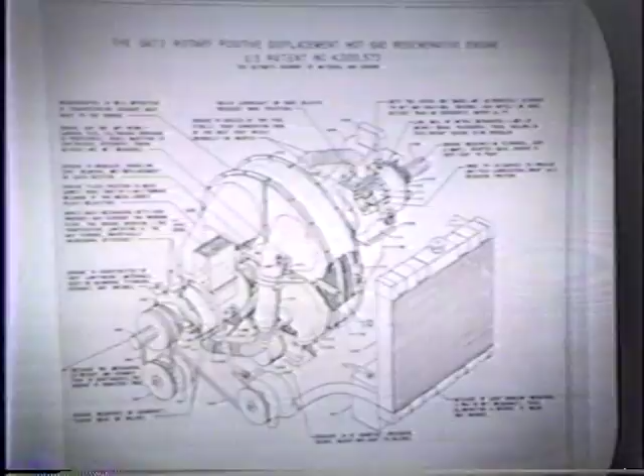Hello, my name is Ron Satz. I'm president of Transpower Corporation, a systems engineering and consulting company founded in 1976. I hold a Bachelor of Science degree in Engineering Science and a Master of Engineering degree in Transportation Engineering from the Rensselaer Polytechnic Institute, and I completed the coursework for my PhD in Mechanical Engineering from the Massachusetts Institute of Technology. I am a member of the American Society of Mechanical Engineers, the Society of Automotive Engineers, and the Operations Research Society of America.

Today's presentation will describe a revolutionary new concept in engine design: the Satz Rotary Positive Displacement Hot Gas Regenerative Engine, U.S. patent number 4,009,573. This presentation is based on my copyrighted book, Theory and Design of the New Rational Combustion Engine, and my paper, The Solution to the Gas Turbine Temperature Problem, published in Volume 20 of the International Journal of Energy Conversion and Management.

The book, which was originally intended to be my doctoral thesis and is now available from Transpower Corporation, contains 28 engineering drawings, 30 tables, 800 equations, 17 figures, and excerpts from the 10 computer programs which went into designing this engine. Nearly 500 pages long, it is one of the most extensive studies of an engine ever written. I left MIT in order to secure patent rights on the new engine.

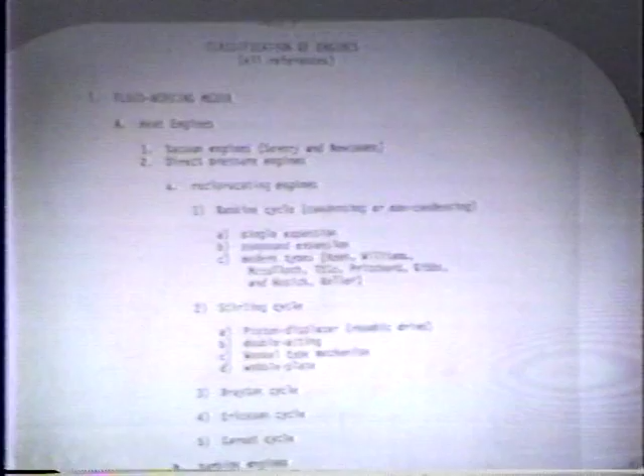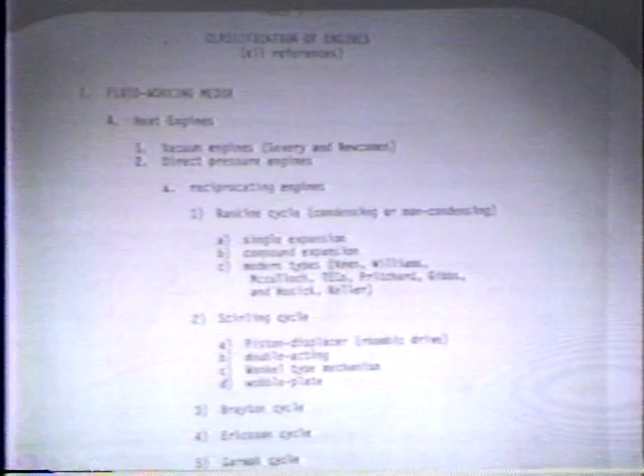Right now, I'll show you a transparency of a classification of all existing engines. There are two main types of engines, those which have fluid working media and those which have electron working media. I'm not going to go in great detail of these different types, but I'll just point out that fluid working media type engines are divided into heat engines and combustion engines. And the heat engines are divided into vacuum type engines and direct pressure engines. And direct pressure engines are divided into reciprocating type engines and turbine engines.

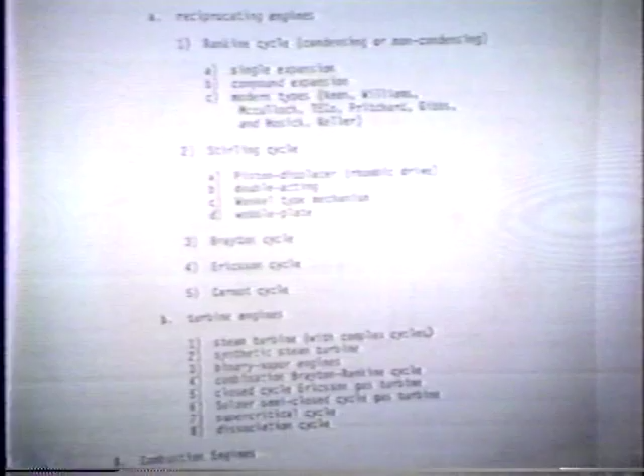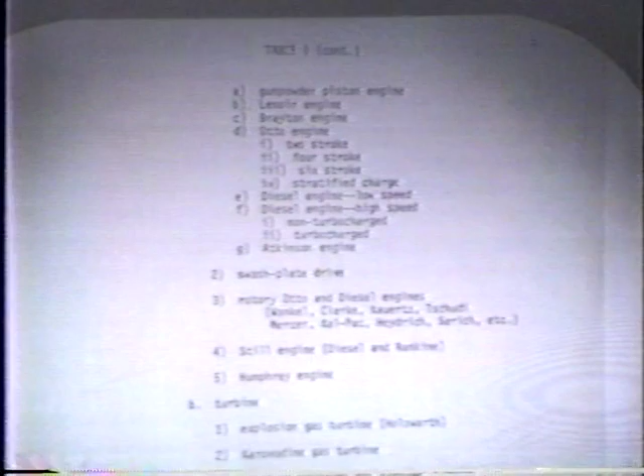The first working gas turbine was built in Paris in 1903 and showed an efficiency of 3%. Like the Brayton piston engine, there were a compressor and an expander, but these components were dynamic rather than positive displacement. It was not until the decade of 1950 to 1960 that the gas turbine was sufficiently developed to replace the reciprocating piston engine in aircraft. The main reason for this success of the gas turbine is its very high specific power density, the ratio of power output to weight.

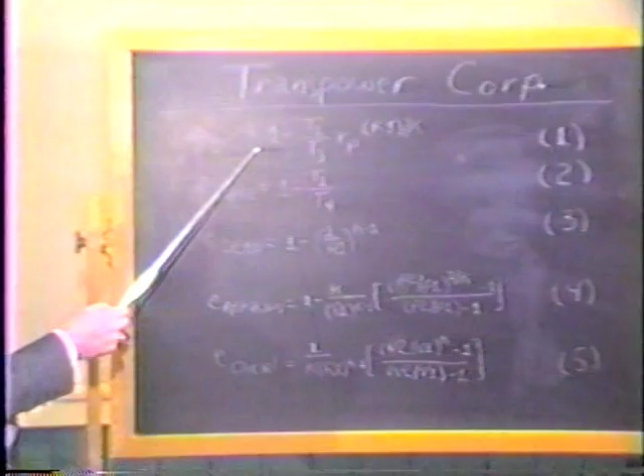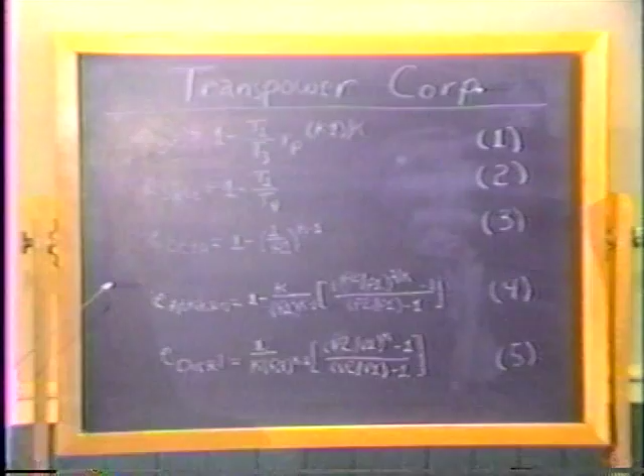The equation for the ideal thermal efficiency of the regenerative gas turbine is given in Faires' thermodynamics as efficiency equals 1 minus T1 divided by T3 times the pressure ratio, that's expander pressure ratio, raised to the power (K minus 1) divided by K, where K is the ratio of specific heats. T1 is the engine inlet temperature, T3 is the inlet products temperature to the turbine expander, R_P, as I said, is the expander pressure ratio, and again, K is the ratio of specific heats of the working fluid.

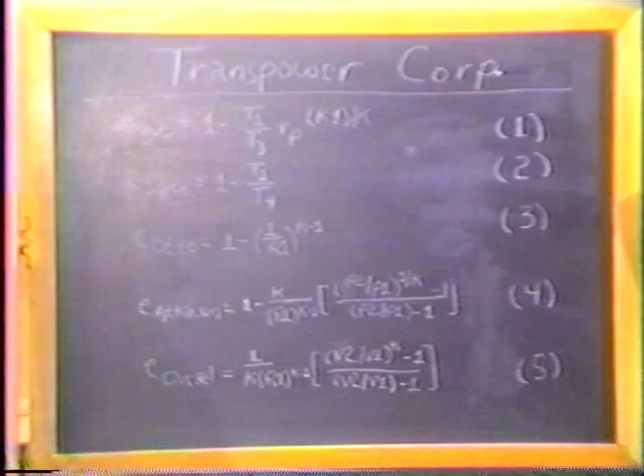Note that as R_P decreases to 1, the efficiency approaches that of the Carnot, Ericsson, or Stirling engines, but with no work done. With ambient air, there is not much that can be done with T1 or K. The only parameter left is T3, which is, again, the inlet products temperature to the turbine expander. So, with each increment of T3, there is a corresponding increment in the efficiency of a gas turbine.

Thus, the focus of gas turbine research over the past several decades has been to find turbine expander materials to withstand ever-increasing temperatures, the current limit being approximately 1311 K. One other method of increasing temperature has been to use transpiration cooling, in which water or air are circulated within the blading. If water is used, the heat absorbed would ordinarily be lost from the engine. If compressed air from the compressor is used, the heat could be recovered, that is, after cooling the blading, the air could be expanded in the expander.

However, if the air does pass through the regenerator first, then not too great a reduction in blading temperature would be possible, for the blading would then be at some temperature between that of the combustion air and that of the cooling air. If the air does not pass through the regenerator before cooling the blading, then of course energy is not recovered. In addition to these heat transfer problems, there are practical ones. How can transpiration cooling be accomplished without drastically increasing the cost of the already expensive blading?

Here then is the gas turbine temperature problem. There are no materials and presently no transpiration cooling methods that can be used to enable the gas turbine to run at such a temperature so as to be able to compete successfully against the Otto and diesel engines below 5,000 brake horsepower.

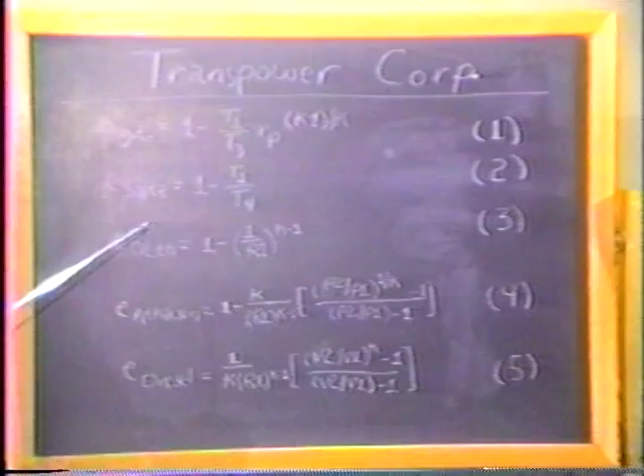Now that equation can be substituted into equation 1 on the blackboard, and we then obtain the equation for the ideal efficiency of the SATS engine, 1 − T1/T4, where again T1 is the ambient air temperature and T4 is the temperature of the fully expanded gas before regeneration. Thus, the higher the temperature that the regenerator material can withstand, the greater the efficiency.

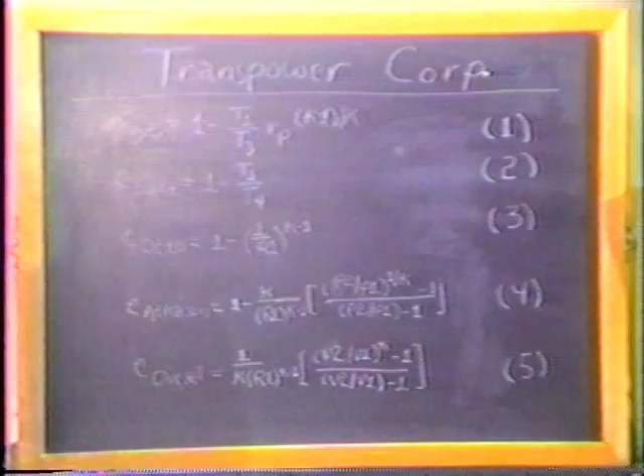For concreteness, let's compare the ideal efficiencies of the gas turbine and the SATS engine. Suppose that T1 equals 302.6 K, which is, by the way, the SAE standard ambient temperature, and that T3 for the gas turbine, that is the temperature of the inlet products to the turbine wheel, is 1311 K. Then by equation 1, we get that the efficiency of the gas turbine is 61.5%. That, of course, is the ideal efficiency, 61.5%.

For the SATS engine, assume that the present maximum temperature that the regenerator can withstand is 1367 K. Thus, in equation 2, T4 equals 1367 K. And therefore, the ideal efficiency of the SATS engine is 77.9%. This is an improvement of 16.4 points over that of the gas turbine. It should by now be clear to the listener that the SATS engine should always be more efficient than the gas turbine. Any exotic new material allowing extra high turbine wheel inlet temperatures could, presumably, be used for the regenerator of the SATS engine, so the advantage should remain.

Okay, now we'll go through a logical derivation of the new engine. The first step is to decide whether the cycle should be open or closed. Closed cycle engines using high-pressure steam, helium, or hydrogen are common in large power plants. However, the open cycle using air is more rational for the following reasons. A, air is free, whereas hydrogen, helium, or water is not. B, no storage of the working fluid is required. C, less complicated control systems may be utilized. And D, high-pressure hydrogen, helium, or water has the potential for leakage and explosions. So the new rational engine will utilize the open cycle.

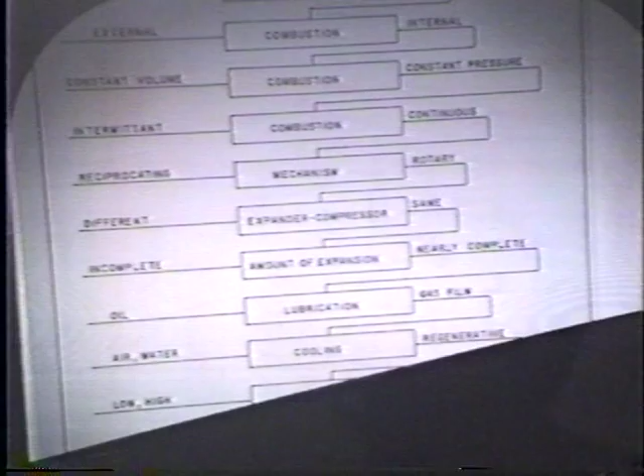would normally be wasted. This principle of regenerative cooling is often used in liquid propellant rockets. Besides, it is desirable to preheat kerosene before burning it. So the new rational engine will have regenerative fuel cooling.

Okay, step 10, low, high, or medium speed. Very large diesel engines run at 100 RPM. Very small gas turbines run at 60,000 RPM. The lower the speed, the lower is the power to size ratio and the more heat transfer out, but the lower the fluid friction. The higher the speed, the better the power to size ratio and the less heat transfer out per cycle, but the greater the fluid friction.

The new rational engine will have a medium-high speed, approximately 12,000 RPM maximum, to have a good power to size ratio and low heat transfer losses without undue fluid friction.

Step 11, control by fuel, air, or both. Engines can be controlled by throttling the air, by metering the fuel, or by both throttling the air and metering the fuel, or by changing the compression ratio. The latter has so far proven impractical, but should be considered a remote possibility. Control by changing the air-fuel ratio, such as in gas turbines, diesel engines, or stratified charge auto engines, is efficient only over a limited range of speeds and loads.

For a broad range of speeds and loads, control by throttling the air and metering the fuel so as to keep the same fuel-air ratio appears to be the most rational, providing fair part-load performance, except close to idling where pumping losses are large. In addition, by varying both air and fuel, excellent responsiveness is assured.

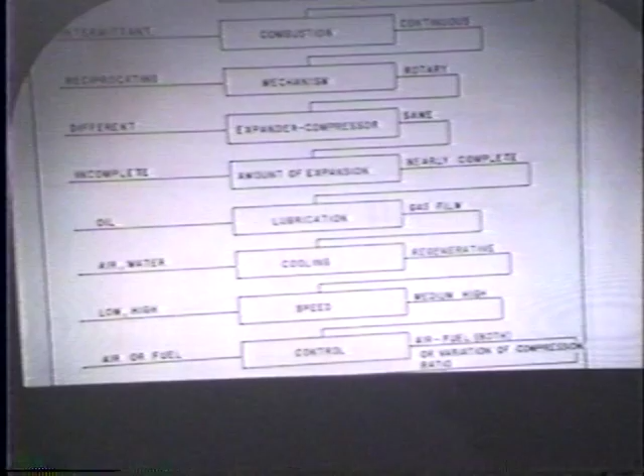And step 12. Non-utilization or utilization of exhaust heat. Almost a third of the energy supplied to an Otto cycle engine leaves the exhaust pipe unused. By changing the thermal cycle so as to be able to use a regenerator, much of the exhaust heat can be put back into the cycle.

In this manner, the exhaust can come out relatively cool, about 560 K, eliminating costly materials for the exhaust ducts. The new rational engine will have a regenerator. So, with all these parameters, we get the SATS rotary positive displacement hot gas regenerative engine.

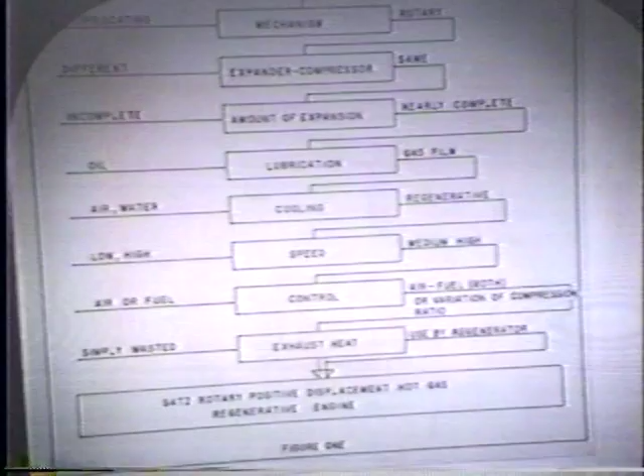Now, section A of this paper compared the SATS engine with the gas turbine. What about other thermal cycles? As the listener or viewer knows, the ideal cycle efficiency of the Otto cycle engine is given by this equation: 1 minus 1 divided by R1, which is the compression ratio, raised to the power K minus 1, where K, as usual, is the ratio of specific heats. In order to obtain an ideal efficiency of 77.9